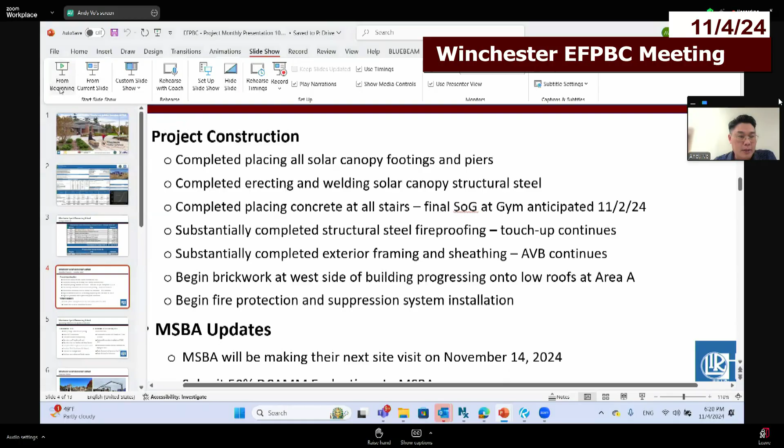So for the month of October, let me just go back to the slide here. We finished placing the solar canopy footing and piers on the west side, west parking lot, the south parking lot, and the canopy in front of the building on the south side.

We completed the last piece of the concrete pour in the gym Saturday. A few of you have seen that - that's the last piece of the slab on grade.

Structural steel fireproofing - we completed that in October, but it's still ongoing in certain areas where they did a low spray. They have to touch up certain areas, especially where MEP installs ductwork and scrapes some of it away, but they touch up on that.

We substantially completed the exterior framing and sheathing. They're doing the AVB going clockwise from the gym, from the north to the south side. I'd say we're about 85% done on the AVB, but the exterior framing and sheathing is completed.

The brickwork we started at the west side at the gym area, then going counterclockwise, as you've seen today. I'd say about 40% of the gym is done, and we're working counterclockwise around the north side right now. We began the fire protection work inside the building.

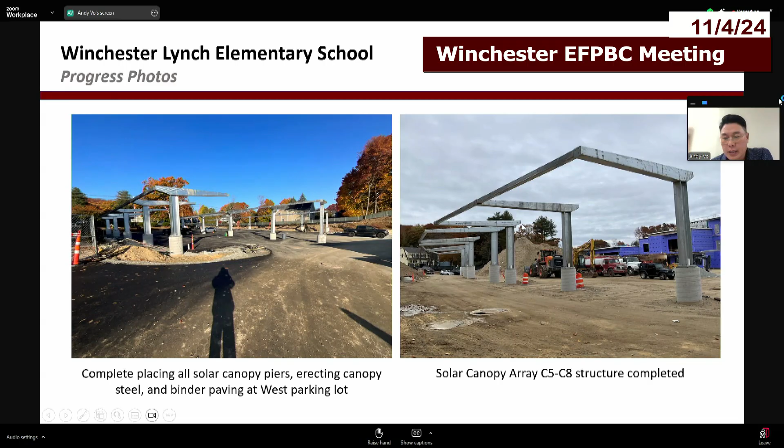Here's some progress pictures. This is the west side, the canopy, the solar canopy. We completed that in October. Here's the south side canopy at the south lot.

The brickwork, we started at the gym, that was started in October. We're going to work clockwise from the north side to the south side. Counterclockwise.

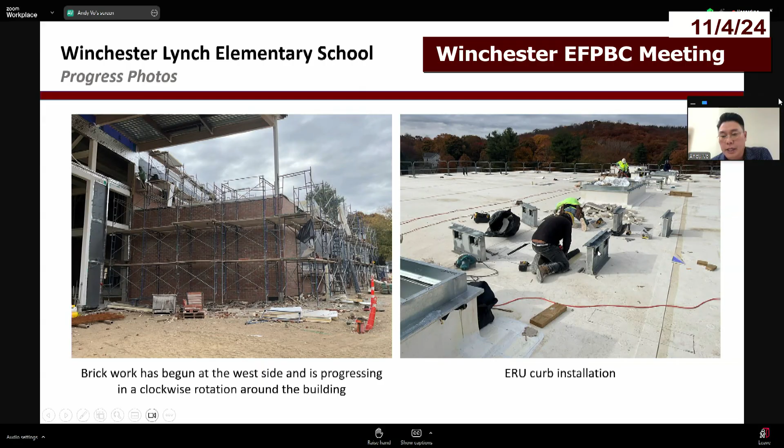We started the ERU curb installation on the roof, so we're going to get that ready for delivery at the end of this month for the rooftop unit.

Ongoing MEP work on the second floor, and this is the third floor MEP work, still ongoing.

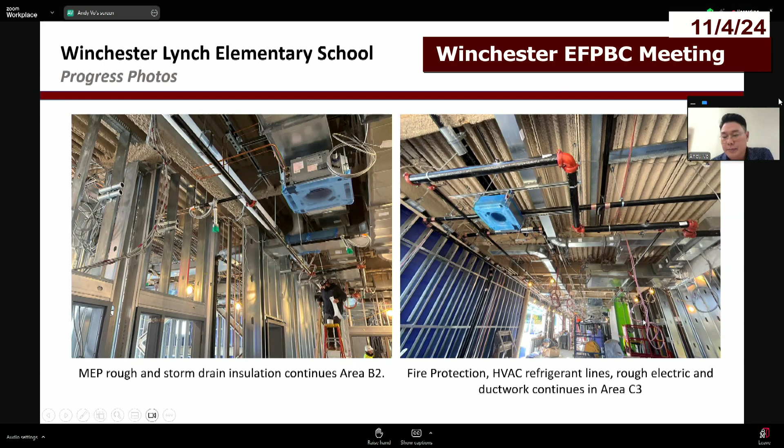This is the interior framing on the first floor, we still have a little bit of that going. We just poured this last section at the gym, the slab on grade, last Saturday.

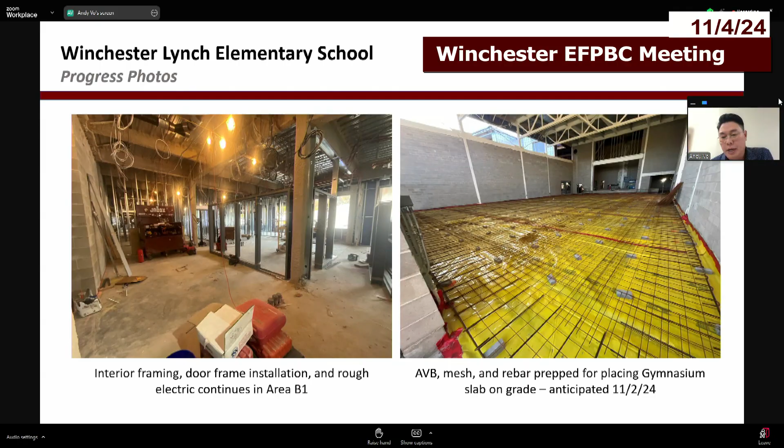And this is the progress looking north. This is the last waterproofing area that I mentioned.

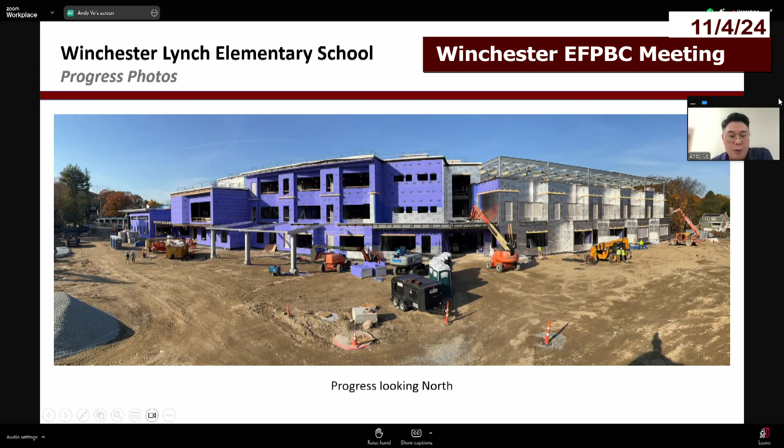And this is looking south side, this is actually the north looking south. So this is the gym. This is before the brickwork, but we already completed this side earlier on the veneer of the brick. So we're going to start from here, doing counterclockwise, going this way around the building.

Any question? I don't see any.

For those of us who missed the site visit today, we had a conflict. Is there any time later this week it would be possible to visit the site? Is there a certain day? We usually meet on site on Thursday. If you want to come together, I can set it up. Andrew Marin, my office can help, he can coordinate something on Thursday if that's available, either before or after the trailer meeting. I'll piggyback on Thursday as well. If you guys just want to shoot me an email, I'll coordinate it.

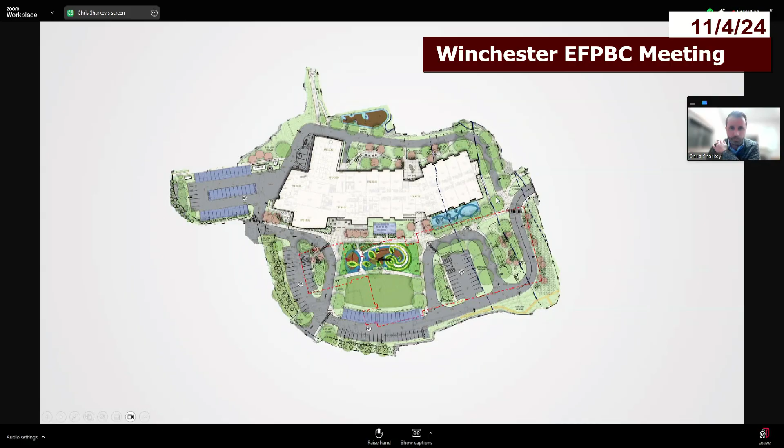So if you can see my mouse, this is the building. The parking lot to the west is over here, this is where folks parked when they visited the site today. We came in through this direction and walked through that way. So main building, we have parking along here, and then the two playgrounds we're talking about right now: this one, the pre-K, and then the K through 5. Right below the K through 5 is a field, it's going to be an open play type of field. There won't be any lines or anything that delineates a specific kind of play, it's just a field for students to play during recess and run around.

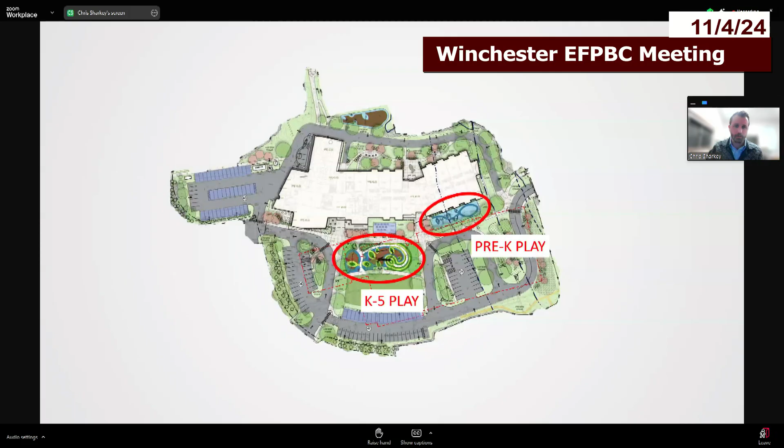So to dive a little more into the pre-K area, it's right outside of the pre-K wing, so it's all connected and easily accessible. You can see in this image, this was the previous design. There were a couple play structures with a spinner and a sensory wall down here, toward the bottom right of this play area. All the way to the right is a track with a soft playing surface in the middle, this blue is that soft safety surface, kind of squishy under your foot. So what we did, talking with everyone, from this design to the new one I'll show you in a minute, is we replaced a lot of the equipment with a larger post and deck structure. It's got a bridge and a tunnel, and we removed any kind of rope feature.

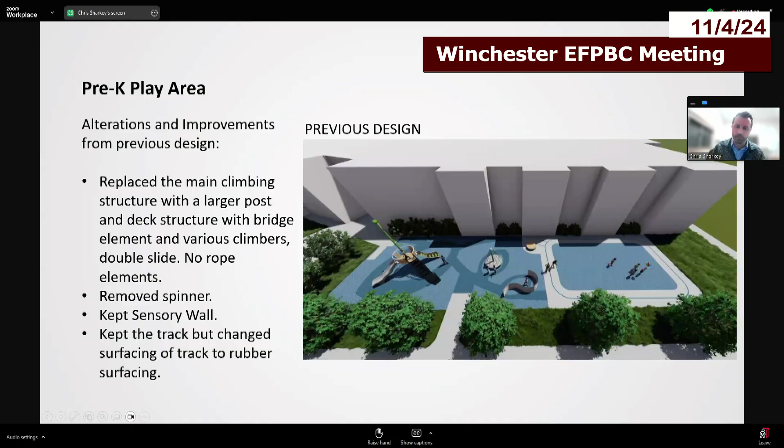So there's no ropes. We removed this spinner here, and then we kept this sensory wall along here, and we kept the track, but we changed it to the rubber safety surface. So this is a plan

of the new structure. So it takes the place of that spinner and that other little playground feature. You can see it's bigger, there's more slides, and it takes a little bit more of that space.

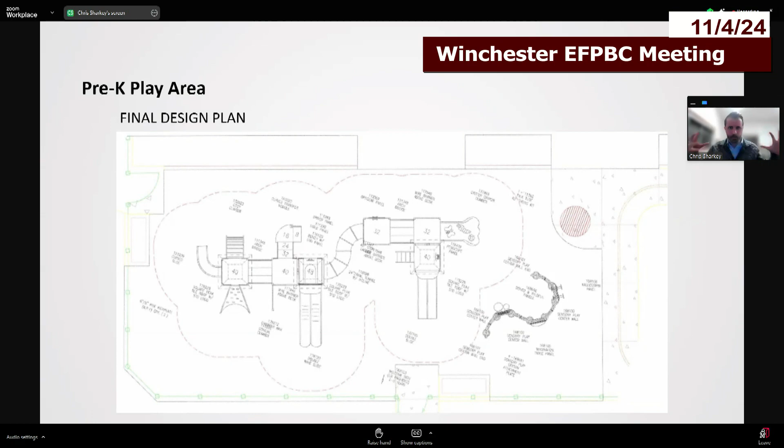And then these are the renderings of that play structure. You can see there's multiple tandem slides coming down. When talking through with the pre-K, one piece that they really liked was this tunnel, so I think that was an important piece for us to replicate, that play that they said their students really loved.

So you can see this is definitely bigger than what we originally had in the space, and it's a little bit more of a structure than we had before.

So this is kind of the flip side. You can see the stairs and the transfer spot, just different play elements within that. Again, we kept the sensory wall, and the track with the new surfacing.

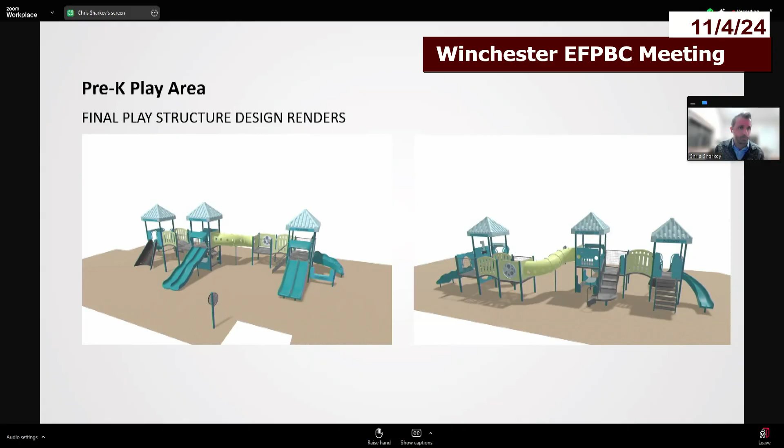So that's more or less pre-K, and then moving to the K through 5. This area, after review, stayed very much more similar to what we had proposed versus the pre-K, where it changed quite a bit.

But a couple things we did change, that you'll see a little bit better in the renderings - there are little connector pieces that we widened a little bit. We made them a rubber belt connection so they'll be a little bit more stable.

There's an embankment slide on this side down here, and we made that double wide. We increased some safety surface. We replaced a spinner that was down here with an accessible spinner, and then we replaced some basket swings with regular belt swings.

One of the really fun parts to this is that this right here is a path up - it slopes up all the way to here, where there's like a little hut. From the top of this hill, a 5-foot berm we're calling it, down to here is just a gentle slope.

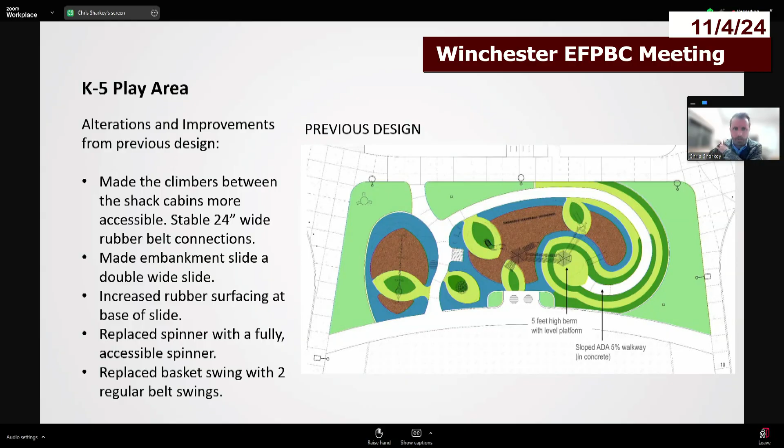And then this is the previous design. Again, when you see the new renderings, it'll be mostly the same stuff. But going back, this over here is the double - we widened it to a double embankment slide.

We increased the safety surface, the rubber surface down here just below that. And then these connector pieces to this hut and then to this hut, we made sure they were wide, rubber belt, a little bit more stable than what we had previously shown here, which was a little bit narrower and a trickier connection.

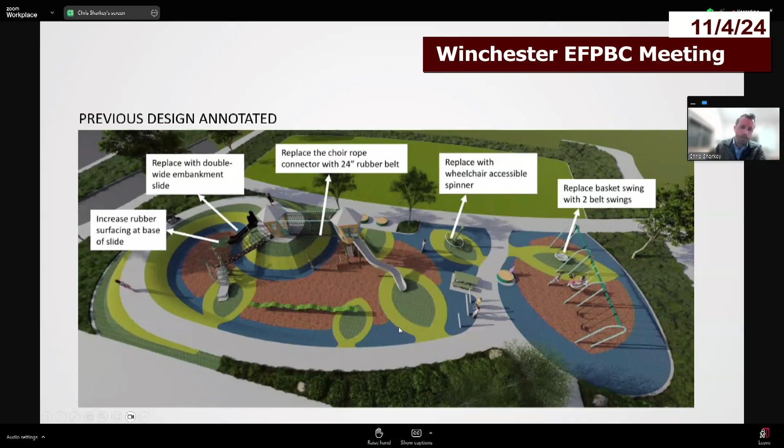And then this was a spinner that we've replaced with an accessible spinner, and some of the swings have been replaced. But generally you can see the slope coming up, and there's a couple pieces that we kept with tables and chairs - generally it looks fairly the same.

Yes, Chris, I think you're... these are probably good images for you to ask this question. Can you just describe to us, Chris, what is the material on the slopes on either side of that gradual ramp? What is the material?

How is it stabilized? Yeah, so it's the rubber safety surface, that squishy surface you've seen on other playgrounds before. So I guess the reason I'm asking is at Vinson-Owen, as Frank is painfully aware, VO opened in the fall of 13, and we're about to replace the entirety of that rubberized surface, are we not? I think we have a supplemental funding request coming to fall town meeting, so it will have lasted basically 11 years.

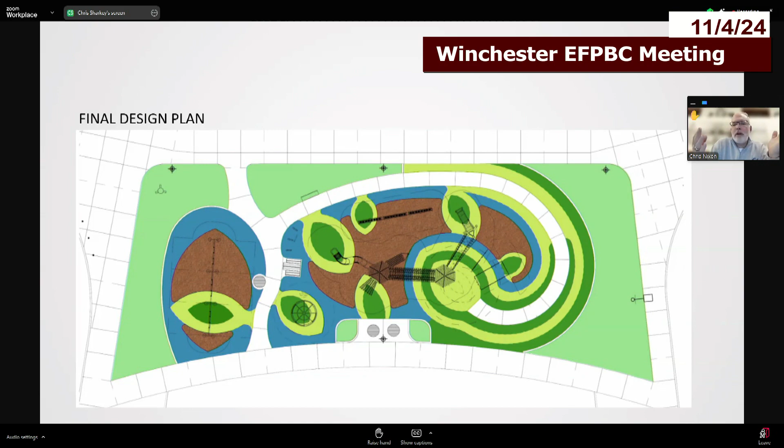What's your feel? I'm seeing how the rubberized surface has deteriorated faster at VO than we expected, and it's just horizontal. I presume the slope here is such that we may have kids crawling up and down the side slopes, right? And then you've got that open joint exposed to the weather. I'm thinking about freeze thaw. Chris, does Tappé have much experience using this rubberized material on a slope like you're showing? Because we certainly don't have that in Winchester.

And is there a high degree of confidence that's the right material for the slope? Yeah, so Warner Larson has done this a lot in a lot of their projects with this ramp and slope design. They've done a number of these types of projects, and I think they're confident in their designs and materials, so I don't have any hesitations with what they've designed.

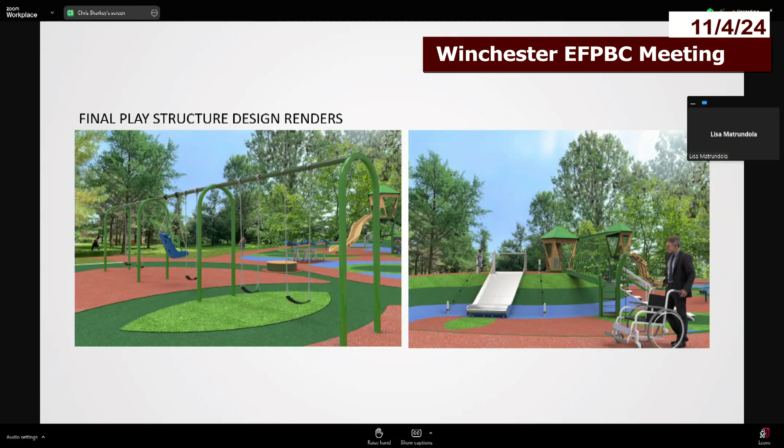I think it looks good, and thanks, Chris. I know you put a lot of time and effort into it. It looks good, it's a big improvement, and hopefully we can get it off the ground, as we say. Yeah, I think it's definitely been a good process. For sure, it's very accessible, so I'm very pleased. Awesome.

I would just echo that, Chris. You've been patient and good and really worked hard at this. I know you've put more time into this than probably anticipated, but you really listened to people's feedback well, and we appreciate the responsiveness. I appreciate that, likewise.

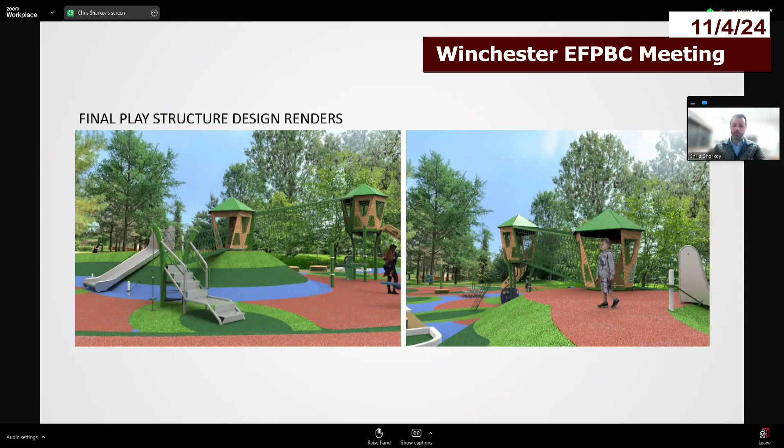Go ahead. I just want to mention that the play structure has a long lead time to it, so hoping to get that PCO approved tonight so we can release that for fabrication. Well, that wasn't on our letter. So we can add that as a vote. Okay, Jay.

The other item we don't have here is the TAPE invoice. I got the TAPE invoice email, but there was no attachment. Andy or Mark, did you see the amount?

I did not, Meg. I got that same email as you did, but unfortunately, when I pulled up my laptop, I noticed that the attachment was not there.

Okay, so I'll just handle that between Jay, and then I'll put it on the next manager's letter.

Okay, so this is pretty straightforward. Everything is the monthly invoices, rates, application number 11 for $4,047,135.44. Triumph Modular, their monthly invoice for $29,850.